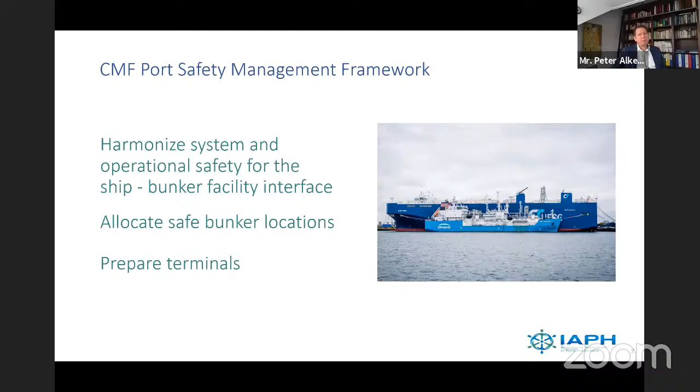We provide this audit tool to audit the safety management system of a bunker facility operator on several system criteria, including training and competence, resources, maintenance, optimal bunker preparation, safe operations, and aftercare. Based on the audit, a designated authority may issue a bunker operator license.

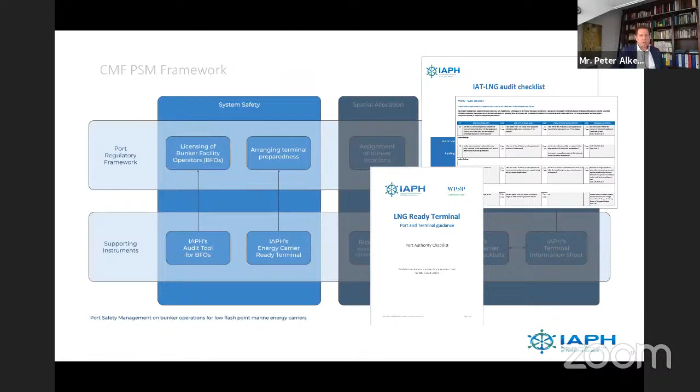On this level, terminals are also prepared on a system level. For this, CMF provides the LNG Ready Terminal guidance tool. It may be used by ports to initiate the preparedness of terminals for safe cargo handling of vessels with new types of fuels and safe ship-to-ship LNG bunkering along their berth.

Also, on an operational level, we ensure harmonization of operational safety of all parties involved in the bunker process. On this level, we provide the bunker checklists, which have already been in use since 2013 for LNG truck-to-ship, ship-to-ship, and station-to-ship. Terminals are also involved on an operational level, and CMF provides the terminal information sheet, which is part of the bunker checklists.

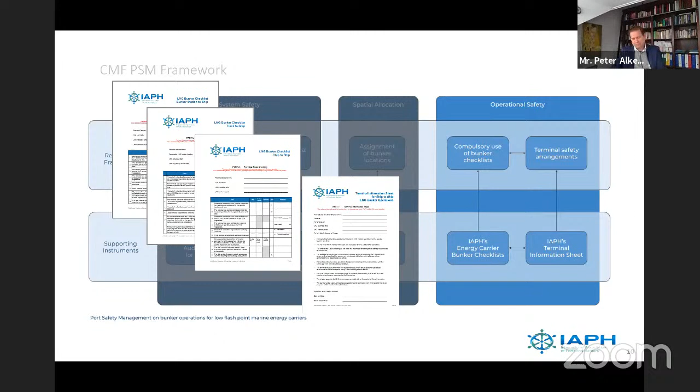And then we come to spatial allocation, and this is quite important. Often, based on national legislation, a port authority may have to decide at which locations bunker operations in a port area are permitted, taking into account, among other things, the spatial planning of the port, risk analysis for external safety, and nautical safety. For CMF, it's rather hard to develop generic support for this safety level.

We are, however, aiming to provide guidance in the port guidance tool we work on. For some ports, it may become the hardest challenge for new fuels: where may the port allow bunker operations, looking at the risks for the surrounding area.

External safety is about risk to the surrounding area when handling hazardous substances, which most of the new fuels actually are. On this slide below, you see the LNG bunkering map for the Port of Amsterdam. It's based on external safety research. Based on quantitative risk analysis, we have assigned bunker locations in the port.

This is not something unique. Port of Rotterdam has done the same, for instance, and I'm convinced that other authorities in countries around the world do likewise for LNG and new fuels.

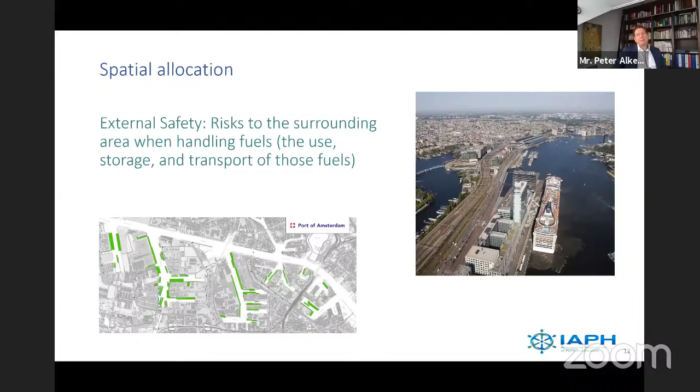As Port of Amsterdam, we also recently initiated a study on the risk of new fuels, including methanol, hydrogen in several states, and ammonia in several states. And although the results are still preliminary, we did already find that for some fuels, it's going to be, again, to say the least, challenging at some locations in the port.

That brings me back to the available instruments we have. This table actually shows the lessons we've learned from LNG. The total package of tools for LNG was completed in September 2020 with the release of the LNG Ready Terminal tool. We consider our LNG tool package as blueprints for the new upcoming fuels. So let's see where we are working on.

On a system level, we're trying to make generic tools of all the tools we have for LNG. The audit tool has to become generic for all fuels, and also the LNG Ready Terminal tool. On an operational level, we've been starting to work on checklists for new fuels, for instance, a truck-to-ship cryogenic checklist for both LNG and hydrogen. Also for methanol, we're developing a flammable and/or toxic liquid checklist for truck-to-ship operations.

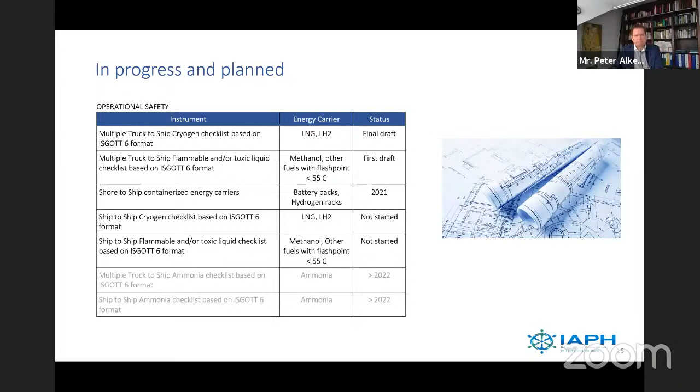I'm sure that the slides will be shared, so I won't go into detail on all the other tools. That brings me to my last slide.

The shift towards new marine fuels brings challenges for ports. High-level, high-quality safety management is required for the new fuels now under consideration, both on the vessel and port side. Ports are working hard to overcome these challenges, and the IAPH Working Group on Clean Marine Fuels continues to develop instruments that support improving existing bunker safety frameworks in ports. When it comes to the IMO strategy to reduce greenhouse gas emissions, cooperation in the industry is essential. I think it's fair to expect that IMO, as well as IAPH, have a role in stimulating cooperation for the implementation of high-quality bunker safety management.

More information on our tools can be found on our website, including videos and guidance documents. Thank you very much for your attention.

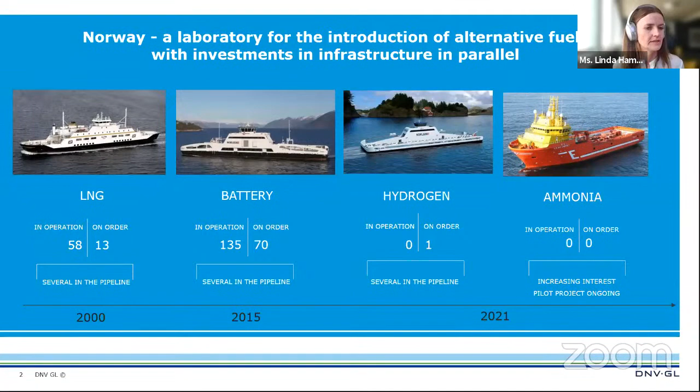In DNV's Maritime Forecast to 2050, we have mapped the key barriers for selected alternative fuels. There is no time to go into the details now, but the report is available online. One key barrier is safety and development of safety regulations. For shipping to succeed in using new fuels, it's a prerequisite that we know how to handle the safety.

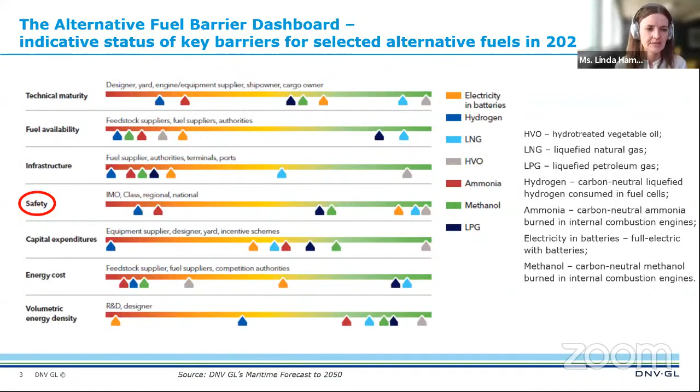So, what are the safety challenges? Most non-conventional fuels are gases or low flash point liquids. They have properties posing different safety challenges from those of conventional fuel oils. The main challenges are fire and explosion. Some are toxic, some are stored at cryogenic temperatures, and there is a high energy content in gas tanks. This requires additional safety barriers to maintain the safety level when compared with conventional fuels.

And since the properties are specific for each fuel, there is a need for development of requirements for each fuel type.

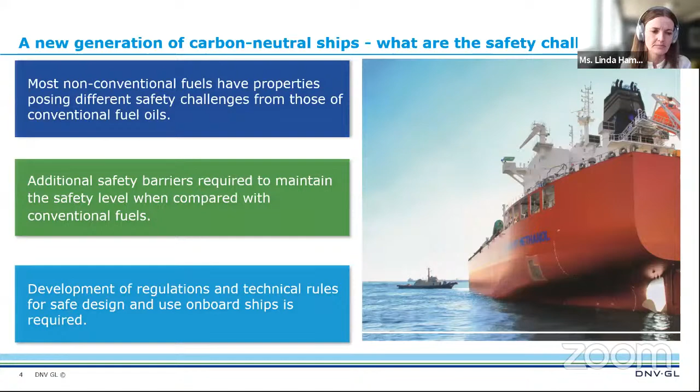It has been a strong focus in Norway to establish requirements for the safe use of alternative fuels, removing barriers to their uptake, starting with national regulations and class rules for LNG 20 years ago, followed by class rules for fuel cells, batteries, methanol, and LPG.

On behalf of the Green Shipping Programme, a public-private partnership in Norway, DNV has recently completed development of an ammonia safety handbook with input from the Norwegian maritime authorities and other partners in an ammonia pilot project. The intention is to provide practical guidance on safety aspects in developing ammonia fuel ships. The first class rules on ammonia as fuel are planned to be published later this year.

There is also ongoing development work for hydrogen, and DNV is working with industry partners on removing barriers. We have initiated the MarHySafe joint development project designed to advance maritime hydrogen-specific competence. This JDP aims to provide preliminary recommendations for safe and effective introduction of hydrogen as a marine fuel in a safety handbook later this year.

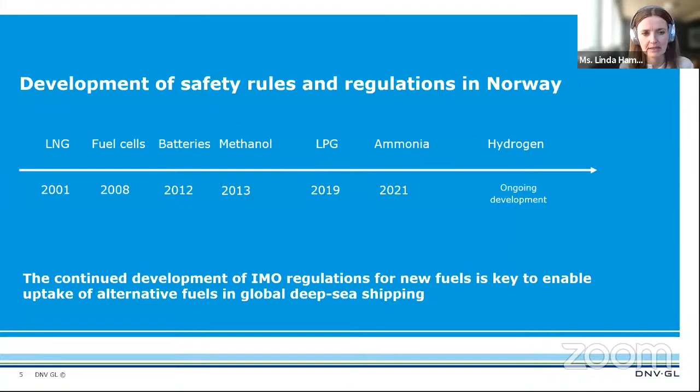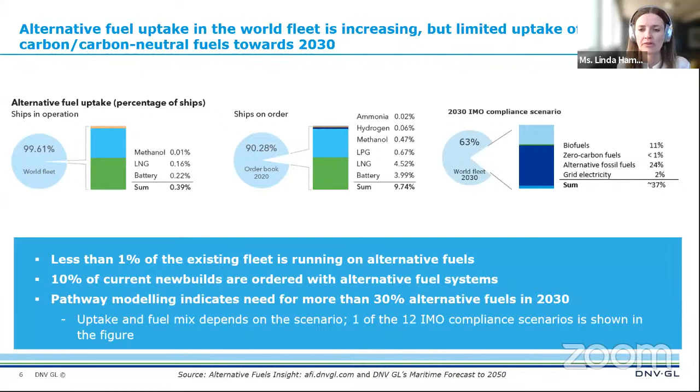To the right, we have shown a 2030 IMO compliance scenario from the pathway modeling in the 2020 edition of the Maritime Forecast, indicating a need for more than 30% alternative fuels in the world fleet in 2030. This is one of 12 IMO compliance scenarios we have modeled, and the uptake and fuel mix depends on the scenario. It should be noted that the picture may be different depending on how the IMO framework develops in coming years.

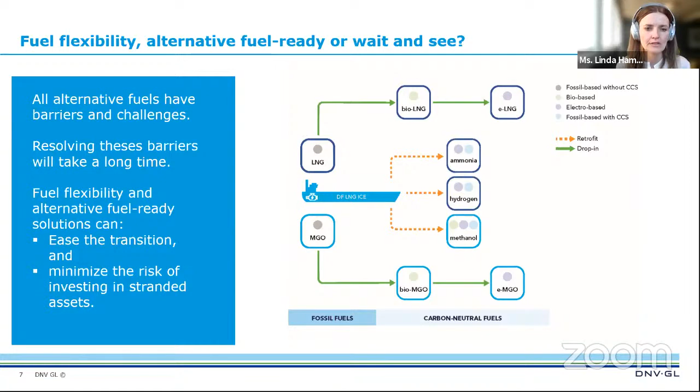If we follow the green line at the top, we see that one can gradually replace fossil LNG with carbon-neutral LNG by switching to bio-based and electro-based LNG when this becomes available. The same flexibility is also possible for MGO as shown with the green line below. For switching to other fuel types, compatibility is more limited and conversion will be necessary for the engine, systems and tanks. By planning a fuel change that requires conversion already at the new building stage, it may ease the conversion at a later stage. This is what we call alternative fuel-ready solutions.

In the development of zero-emission solutions for deep-sea shipping, we need pilots. There are different opportunities in short-sea shipping and deep-sea shipping, and not all technologies are yet applicable in deep-sea shipping. The experience in Norway is that the introduction of alternative fuels and new technologies in short-sea shipping is a good way of maturing technology for use in regional short-sea shipping and later global deep-sea shipping.

The continued development of IMO regulations for new fuels is key to enable uptake of alternative fuels in global deep sea shipping. Thank you for listening.

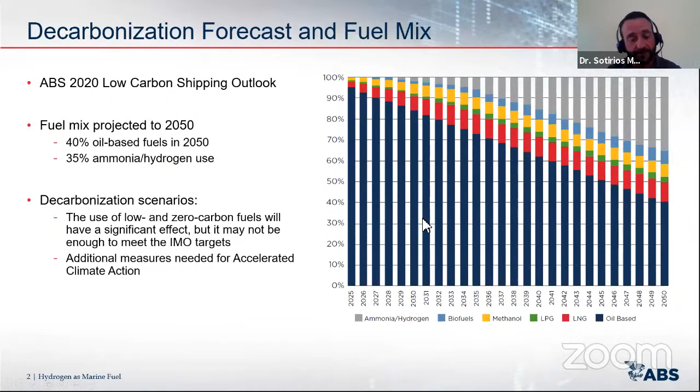That has to do with the fuel containment systems, the fuel gas supply systems, and of course the operational methods and techniques you can apply to maximize the benefit of using a zero carbon fuel such as hydrogen. So hydrogen is at the end of our light gas pathway, and by the end we mean longer term - 2035, 2040, all the way to 2050.

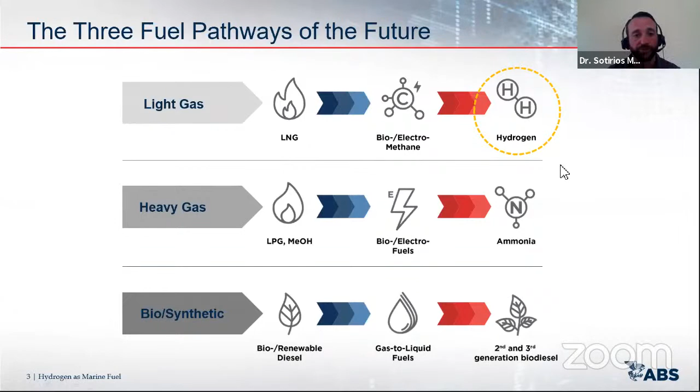Now a few important basic things about hydrogen. Based on International Energy Agency numbers from 2019 global production, about 75% of hydrogen is produced from natural gas, and about 23% is produced from coal. That immediately leads us to believe that the production itself is a carbon intensive process - that does not make hydrogen very green. So we immediately know that in order to promote the green credentials of hydrogen as a fuel, we need to find other ways to produce it, using for example renewable energy and, of course, water as the source.

Hydrogen and ammonia are directly linked in the production pathways, because once we have hydrogen formed from whatever the source is, we can combine it with nitrogen to produce ammonia. So really, the production pathways being linked means they can be produced in the same facilities or in sister facilities, which can be either centrally located or distributed.

The challenge, as you may have heard, with hydrogen comes from its storage and transportation. It's kind of challenging to store it as a gas or a liquid, and I'll tell you about it in the next slide. But recently we've seen the advent of solid or liquid storage techniques, such as using liquid organic hydrogen carriers, for example. I'll tell you more in the following slide about it.

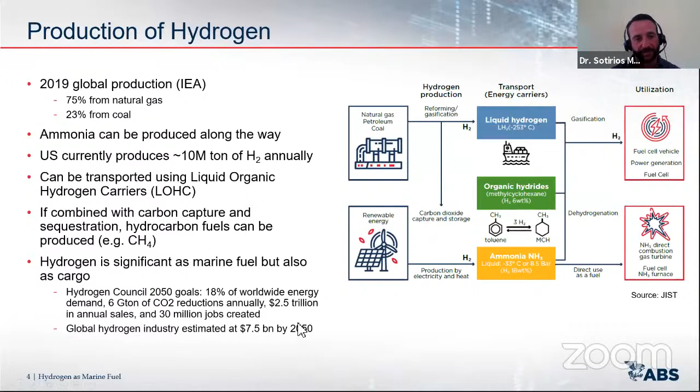Now let's talk specifically about hydrogen storage, which will give you a better understanding of the challenges associated with this zero carbon fuel. As we previously mentioned, hydrogen can be stored as a gas or a liquid, and there are benefits and challenges to either option. It can be stored as a gas at 350 to 700 bar compressed, or as a liquid, cryogenically stored at minus 253 degrees C at atmospheric pressure.

The importance of this comes from the fact that there are applications with stringent requirements in terms of space - automotive, for example. Marine applications not so much, but we still care about space and tank volumes on board. A lot of these solutions are currently in the research and development phase. Recently, in the last couple of weeks, I saw an article about a method of storing hydrogen in a gel type structure that can be easily decomposed to extract the hydrogen on board, whether in a marine vessel or an automotive application.

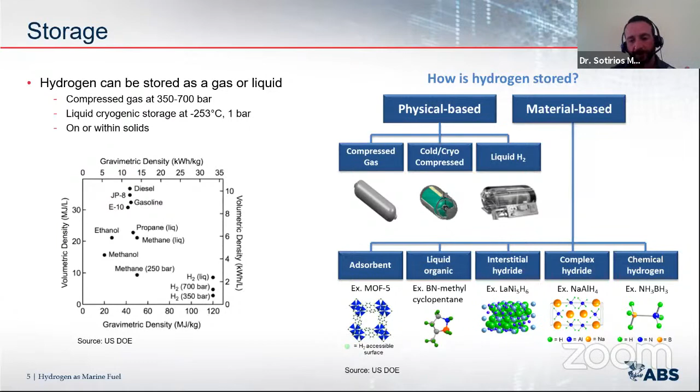Now, with that, I'd like to focus your attention on some of the supply chain framework solutions and challenges we've seen so far. Due to the very limited number of applications of hydrogen in the marine sector, we don't have a lot of examples, but we have one recently published by Kawasaki Heavy Industries, and I'd like to show a graphic that I sourced from that publication.

But as we mentioned at the beginning of this presentation, this is a pretty carbon intensive production process. So there's one thing we need to take care of: make sure we reduce the carbon intensity from production as much as possible. With that said, in terms of IMO actions, there's a lot of discussion about accounting of life cycle emissions when we're talking about alternative fuels.

This is a question we get very often from customers. They would ask, if I use a biofuel or something else produced renewably, can we get some benefit from that? And if so, how are these benefits quantified - what's the credit for us? That's really something you can point back to the IMO to discuss - life cycle emissions accounting.

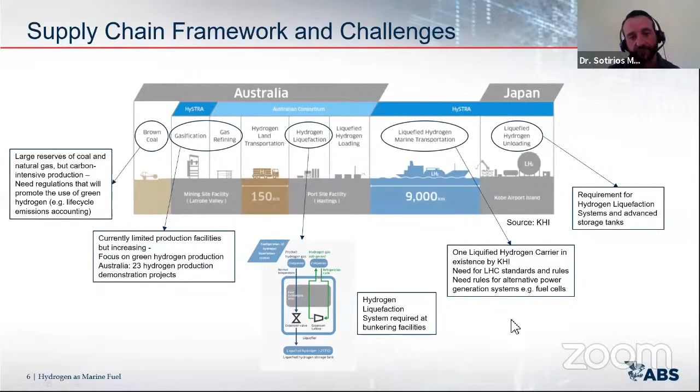Of course, distribution is still an issue. We've seen examples of trucks carrying hydrogen, because the fuel's properties make it very challenging to build pipeline infrastructure. That points toward more distributed or localized hydrogen production stations rather than central production with pipeline delivery to multiple sites.

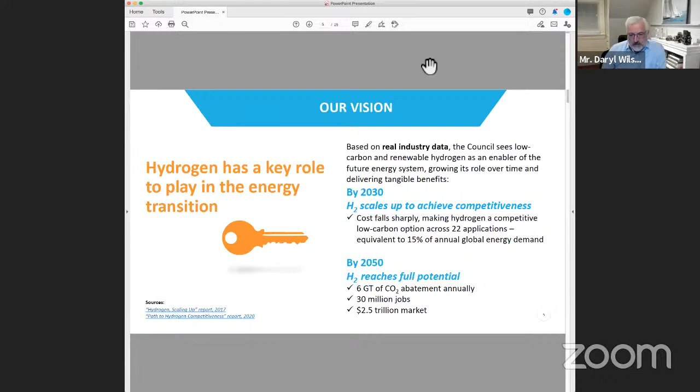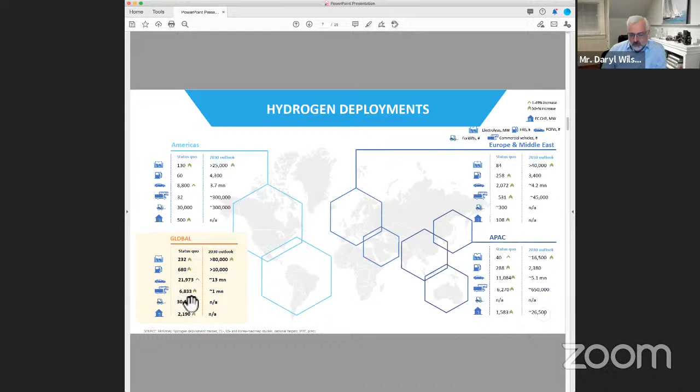Here we summarize some of the applications already under development around various regions in the world. You can see that already we have 680 hydrogen fueling stations globally, more than 20,000 passenger car vehicles, and more than 6,000 trucks. So perhaps more activity than you were aware already.

Early next week, we will release a report which shows a profile of projects that have been announced. You can see there is a lot of activity in Europe, Asia, and Australia, and we're tracking more than 200 projects ongoing for the production and large-scale industrial use of hydrogen in transport and many other infrastructure projects.

The total value of this investment is substantial. It now amounts to more than 350 billion in announcements. And out of that very large number, 38 billion have already passed investment decisions. So a lot of progress of late in hydrogen.

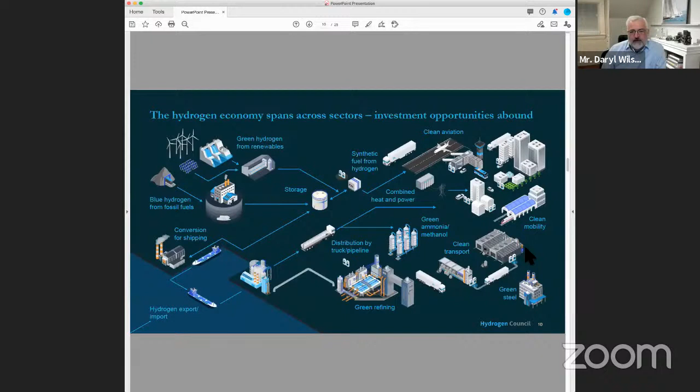One of the compelling aspects about hydrogen is it's able to serve as an energy vector across multiple sectors in society. In fact, we sometimes use the word sector coupling. You can see on this slide that hydrogen is involved in shipping - we'll come to that in a moment - in the migration of renewable energy as an energy carrier and a means of storage, integration into industry, in aviation, in transport. So many functions can be carried out with hydrogen as an energy vector.

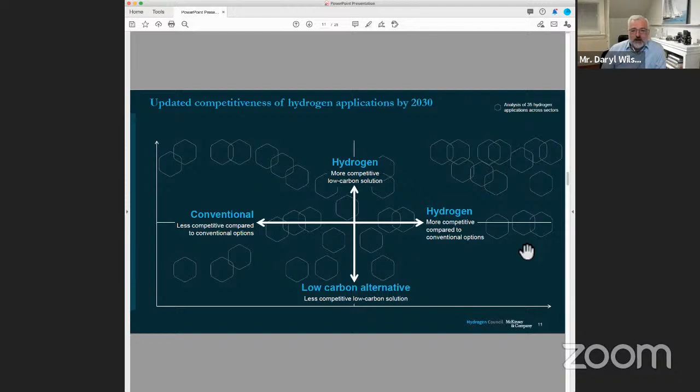To understand these diverse applications, the Hydrogen Council prepared a report, and this again will be updated very shortly, coming next week, with a spectrum of the applications considering which ones are most competitive against incumbent solutions, conventional energy pathways, and then which ones where hydrogen is the most competitive green energy pathway. The attractive location on this matrix is in the top right-hand side.

Listed in the top right-hand side, in the orange, is fertilizer and ammonia fertilizer in particular. So when we discuss ammonia as a fuel for marine shipping, it is actually on the radar for one of the most competitive decarbonization pathways for hydrogen.

You'll also see in the middle of the screen the RoPax marine application and small regional ferry applications, also showing strong competitiveness in terms of hydrogen applications.

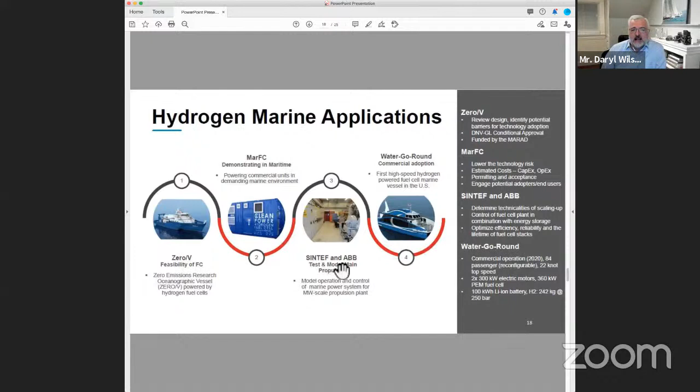One of the key activities of the Hydrogen Council is to make clear the competitive and cost profile for hydrogen. Cost is one of the impediments over time, and we have taken the role to start to show the roadmap for cost reduction to realize some of these applications.

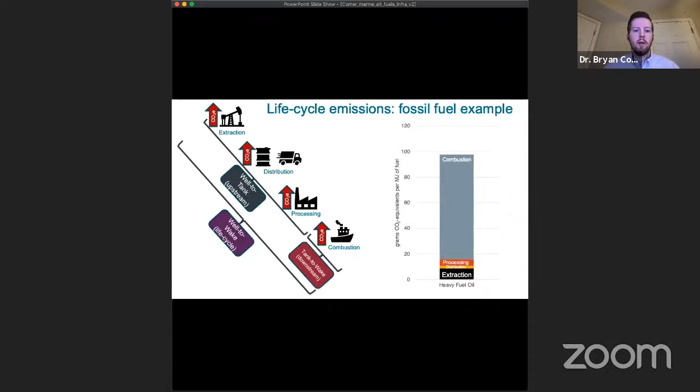Life cycle emissions from fossil fuels, like the example heavy fuel oil on the right, are generally dominated by combustion emissions, which you see in gray. However, upstream emissions, especially those from extraction and processing, can vary considerably.

Now let's consider a biofuel made from a food crop, in this case soybeans. Instead of extracting crude oil from the ground, soybeans are grown and then converted into what's known as renewable diesel. It's called renewable diesel because the feedstock, the soybeans, are a renewable resource. But just because it's called renewable does not necessarily mean that it's sustainable.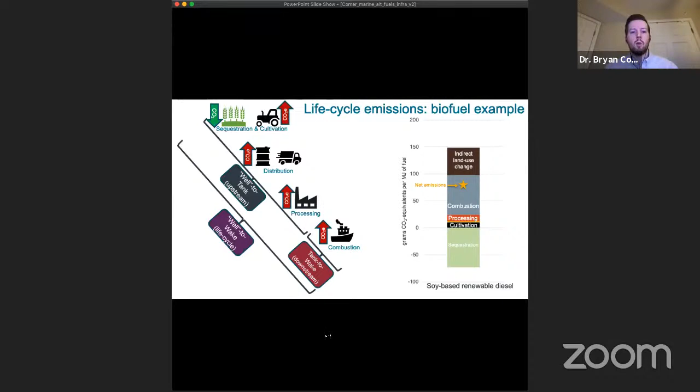Because soybeans are a food crop, the soybeans that are grown to make biodiesel displace those that are used for food. And to continue to meet the demand for soybeans, new land will be cultivated to grow soybeans for food. The emissions associated with indirect land use change can vary significantly depending on the crop and also what the newly cultivated land was previously used for.

So as you can see, one must carefully consider the climate credentials of fuels to determine whether or not they are truly sustainable. To help, the ICCT has developed 3 principles for evaluating the sustainability of alternative marine fuels, and allow me to go over each one in a little more detail.

The first principle is to consider carbon dioxide equivalents, not just carbon dioxide. Why? Because some fuels are zero carbon, but not zero greenhouse gas. This is important to IMO because IMO's initial greenhouse gas strategy aims to reduce greenhouse gases by at least 50% from 2008 levels by 2050 and to phase them out completely as soon as possible this century.

The pitfall IMO must avoid relates to zero carbon marine fuels that nevertheless emit greenhouse gases. For example, burning ammonia emits no carbon dioxide, but it does emit nitrous oxide, N2O, a potent and long-lived greenhouse gas. For now, IMO regulations like the EEDI only regulate carbon dioxide.

Given that IMO's stated goal is to reduce and eliminate greenhouse gases, which are reported as carbon dioxide equivalents and not merely carbon dioxide, the IMO could regulate carbon dioxide equivalents in existing and future regulations, including the EEDI, which regulates the carbon intensity of new ships, and in regulations under development to regulate the carbon intensity of existing ships, including the EEXI and the carbon intensity indicator.

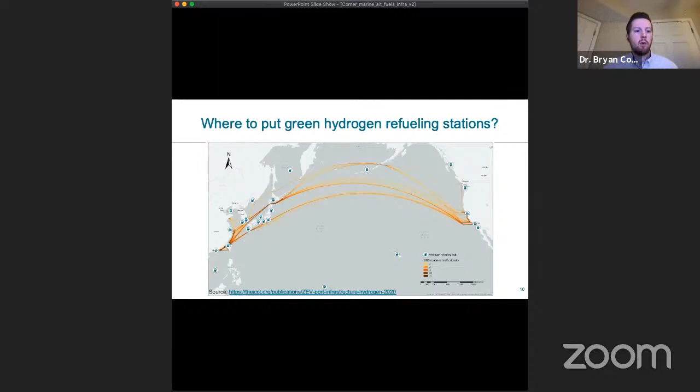The circular fuel icons are places where green hydrogen refueling stations could be placed. To replace all fossil-fueled ships with hydrogen on the Trans-Pacific corridor, ports would need to supply about 750,000 tons of hydrogen each year, especially in Northeast Asia and in California's San Pedro Bay region. This is equivalent to about 1% of the hydrogen used in the industrial sector each year.

But the difference is that this hydrogen would need to be made from renewable electricity to be sustainable, whereas, as we heard earlier, nearly all hydrogen used today is made from fossil fuels.

Now that you've seen an example of how sustainable alternative fuels could be used, let's conclude with some ways that IMO could help ensure that policies promote sustainable alternative marine fuels that have bona fide climate credentials based on the three principles we outlined earlier.

First is replacing carbon dioxide with carbon dioxide equivalents in proposed and existing regulations. Second is calculating carbon dioxide equivalents based on the 20-year global warming potential of climate pollutants like black carbon and methane, for regulations that are meant to align with the Paris Agreement temperature goals. And the third is regulating well-to-wake carbon dioxide equivalent emissions, not tank-to-wake, in policies that are designed to promote the uptake of sustainable alternative fuels.

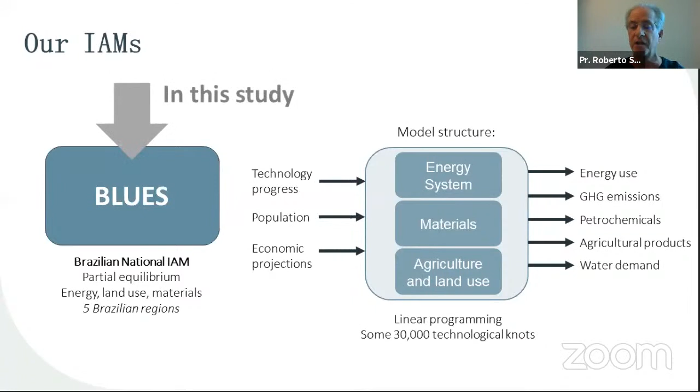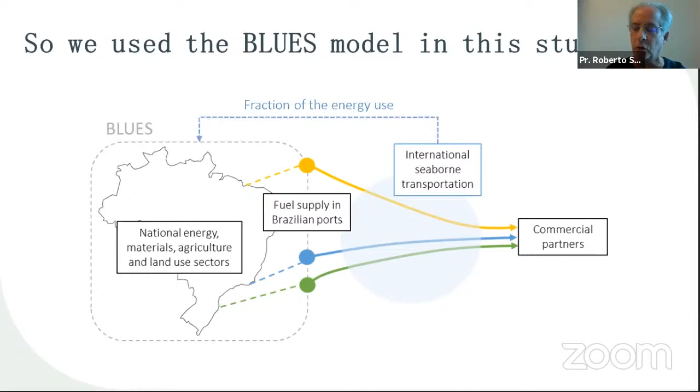So what we have done is basically use or adapt this integrated model for Brazil to represent international shipping and to represent maritime fuels into that model, to see how the model will react to, for example, meeting the IMO target by 2050. So how we have represented these fuels into our models.

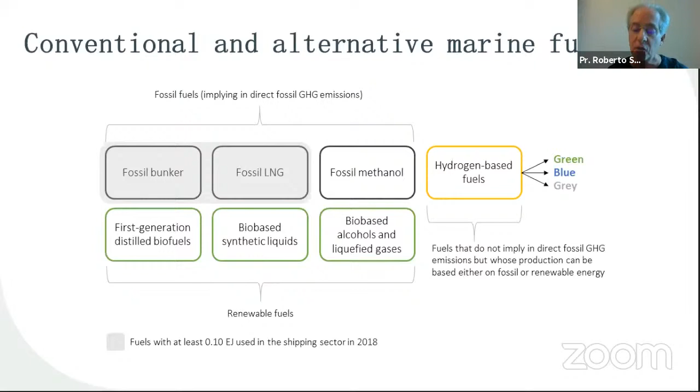We have split these fuels into fossil fuels, implying direct fossil greenhouse gas emissions. So we have looked into fossil bunker, fossil LNG, and fossil methanol. But we also have looked into renewable fuels like first generation distilled biofuels, bio-based synthetic liquids, and bio-based alcohols and liquefied gases. And also from the hydrogen side, we have looked into hydrogen-based fuels, and we have looked into green, blue, and gray hydrogen. This, as I'm going to show you, does make all the difference in the results and analysis I'm going to be performing here.

So this is very briefly how the production routes of these different fuels are represented in our model. In the case of the fossil routes, we're talking about crude oil, producing oil, going through an oil refinery, producing fossil bunker, or you can produce ethene and through oligomerization produce fossil bunker, or natural gas through liquefaction producing liquefied natural gas, or through chemical synthesis producing fossil methanol.

In the case of hydrogen-based, we have looked into hydrogen that could produce ammonia through the Haber-Bosch process, or you can produce hydrogen liquids and then go into hydrogen bunker or electro bunker, depending upon if I use electricity-based hydrogen to do that. It's also important, I'm going to focus on that later, the byproducts associated with some of these routes.

So basically, eventually, we may have a fossil route or a renewable route or a hydrogen route where the fuel for shipping is a byproduct of other products, and this does make all the difference in the results I'm going to be showing you.

In the case of bio-based fuels, we have looked into ethanol for bioethene production and then through oligomerization producing biobunker, or lignocellulose biomass through bioethene or biomass-to-liquids to produce biobunker, or using biomass residues also through BTL or biodigestion to produce biomethanol or biobunker, and also vegetable oil through hydrogenation to produce hydrotreated vegetable oil or direct use as straight vegetable oil.

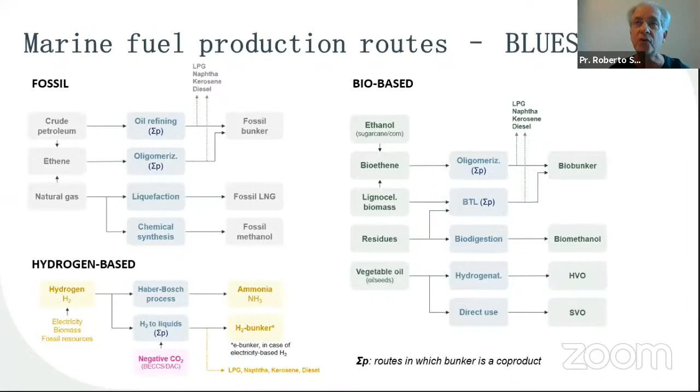So these are all, let's say, fuels that we have put into our integrated model to see the responses to that. So we have run two different groups of scenarios.

In the case of group 1, we have run 4 different scenarios. The first one is a baseline scenario, basically meaning we're not concerned about IMO targets, but simply look into the future of international shipping in terms of fuel. Then we have interpreted the IMO target as being CO2 only, meaning that we would meet the IMO 2050 target in terms of CO2 only, 50% reduction by 2050 as compared to 2008 in CO2 only. And we're not concerned about any national target, but only the IMO target.

Or we have interpreted the IMO target in terms of greenhouse gas emissions, so we are talking about CO2 equivalent in 2050, 50% below 2008 numbers. And also we have added a new scenario, which is the most important one, and hopefully the most interesting one, which is a Brazil below 2C scenario. So basically, we run a scenario for Brazil in a below 2C world to see whether or not IMO targets would fit well into this strategy for Brazil. I think this is the most interesting result I'm going to be showing you later on.

Also, in the case of group 2, we have run 4 different scenarios. One is what we call an IMO drop-in scenario, which basically means we meet the CO2 equivalent target for IMO, but only using drop-in fuels. Or the same way, let's say we meet the IMO target in CO2 equivalent, but only using hydrogen bunker fuels, or only using methanol, or only using ammonia.

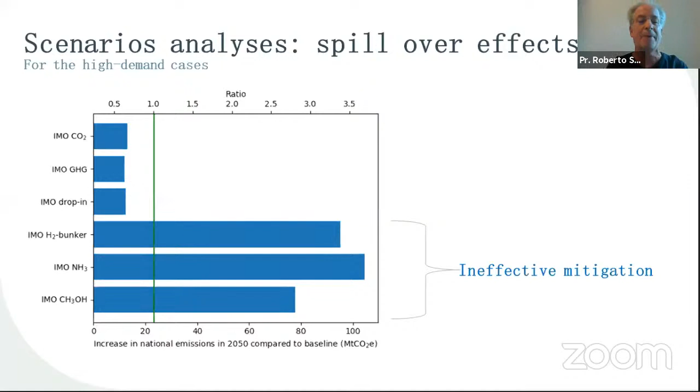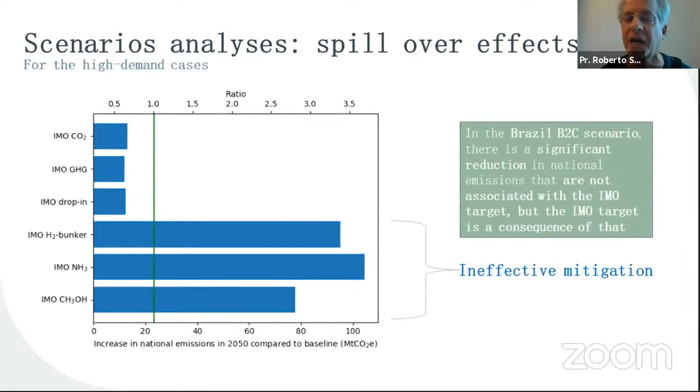It's interesting to say that in the below 2C scenario for Brazil, we do not have any significant impact on national emissions. On the contrary, the below 2C scenario for Brazil, as a side effect, also has the IMO target embodied into that solution.

So thank you very much. So the message here is exactly that: the real interpretation of the IMO target should be in a broader context of integrated assessment model, so that we see the target is a byproduct of a country's result.

Just to get the big picture, most of the projects included in the mapping have a connection to Europe—about two-thirds of the total 106 projects. There's several reasons for that: we're based in Europe, we have a lot of member companies based in Europe, so that biases the research. But we also think there is a lot of activity going on in Europe, and Norway, the Netherlands, Denmark, and Belgium all have numerous projects in the mapping.

Since the first edition, we've managed to expand the geographical spread so that we now include almost twice as many projects in Asia as before. We believe and expect there are many more projects we have not yet uncovered, but based on the timing of the projects we have found, we suspect there is an increase in activity happening in Asia as well. So we do see a broadening in the geographical spread of activity in this area.

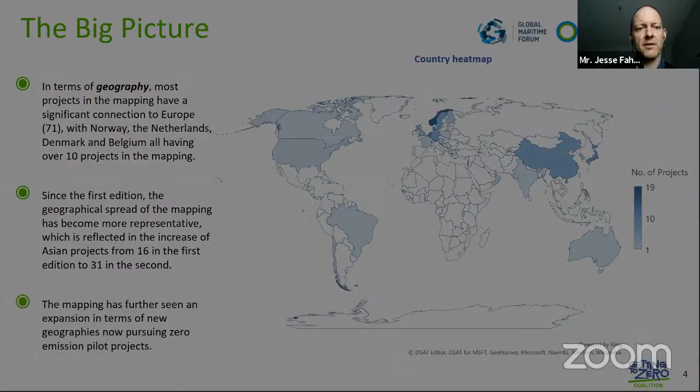We've also seen a couple of new concept studies launched in 2020. For smaller ships, we see a continuing trend towards hydrogen and battery power, and in fact a lot of combinations of the two. This is perhaps unsurprising, but what you might guess from these two bits of information is you're getting increasing specialization in the demonstration projects.

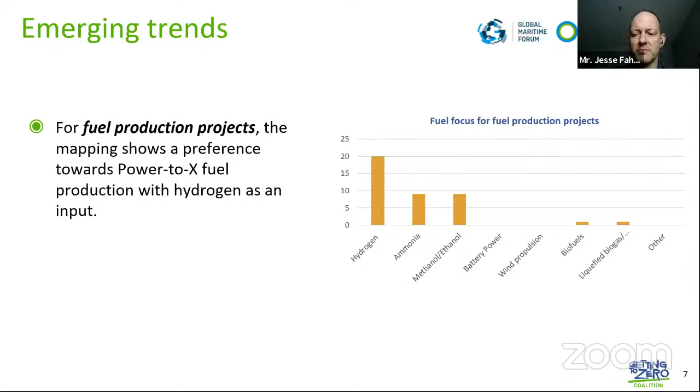On the fuel production side, there's been no major shift in trends here over time, but we do see focus on power-to-X fuel production, so hydrogen-based fuels, as really the dominant focus for these studies. That's perhaps not so surprising, given that some of the other options are more mature and maybe don't require quite as much demonstration or piloting.

In terms of project type and developments, if we look back at the first edition of the study, about 10% of the projects included have since then, in the last 6 months, announced a new phase or expanded the size or scope of their work, which we think is very positive. Of course, we hope that will end up being a much larger number over time. 6 months isn't that long—many of these projects have 4 or 5 year timelines.

Of the 106 projects in this mapping, over half received direct public funding. It's important to clarify that there are many kinds of public support that do not appear as direct public funding through easily identified public funding vehicles, so there's probably other kinds of public support for some of these projects. But the majority of public funding for these projects has originated from Europe.

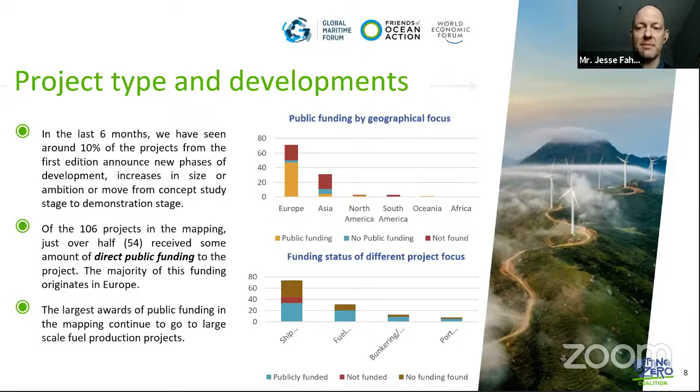The largest awards of funding go to large-scale fuel production projects. That's also not surprising, given that these are probably the most capital-intensive items in our overview. It's also important to note that while many projects don't report whether or not there is public funding—indicated as 'no funding found' in the lower graph—there are some that specifically identify themselves as not being publicly funded, being fully privately funded.

So what next? This edition of the mapping is actually not public yet. We're happy to share this presentation with the participants today. That's not a problem. We will be giving a broader launch at the beginning of March. And included in that, we'll make available the full list of projects that we've uncovered with the brief summaries, including the information that you saw in this overview for each project.

Our hope is that by making it publicly available, we can help people who are undertaking projects or considering doing so draw upon learnings from other projects, but also just improve the broader confidence in undertaking these initiatives, both from the industry side and from the policymaker side. We're going to continue to update the mapping ongoing, and we expect to release one report every half year or so. Thank you very much.

I'm happy to take questions, of course, in the question and answer period. And if you would like to contact me offline, particularly if you'd like to see if your projects were included in the study or would like to provide information about a project, we'd be happy to receive that. As we say, the updates are ongoing. So thank you very much.

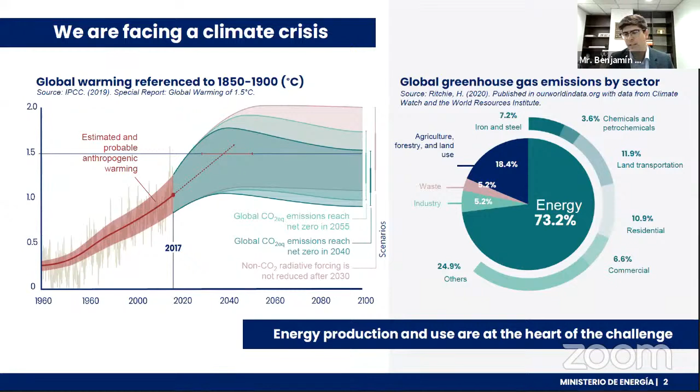So I don't need to explain this to everyone in the audience. This is something that we all know. Energy is at the heart of the climate change challenge. We need to change the way in which we produce and consume energy if we are to curb this rising concentration of CO2 in the atmosphere. And today I'm going to show you what some of the key efforts of Chile are focused on in changing these production patterns in the energy sector.

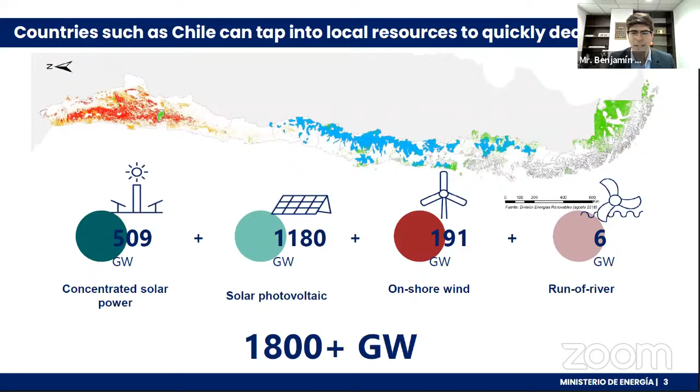So Chile is blessed with a lot of renewable resources. Many of you probably know this, as many other countries in the world. The curious thing about Chile is that it's a very remote country with a very small economy relative to other countries. So this potential actually outmatches whatever consumption potential we might have internally. So this provides a huge opportunity for the production and export of clean fuels that are going to be carrying this renewable energy through the world and are going to enable its use in several applications, not only in Chile, but in a port in Europe, in a bus in China, and who knows what else.

So we did a study last year with McKinsey & Company to underpin the national hydrogen strategy we were preparing. And according to their numbers, we have some great projections for cost relating to green hydrogen production. And when you have cheap green hydrogen, you also have cheap green ammonia, cheap green methanol, and cheap synthetic fuels, or at least relatively cheap as to other parts of the world. So by 2030, we will be getting to price levels or cost levels that are going to make our green hydrogen fully competitive against gray hydrogen in some conditions. And by 2040 or 2050, our green hydrogen could even be competing against natural gas directly, even without any price on carbon. This is fully economic analysis without any price on emissions.

And it's not only a very competitive potential, but it's also a very vast potential. So over 160 million tons of green hydrogen could be produced in Chile with the renewable resources that we already have mapped.

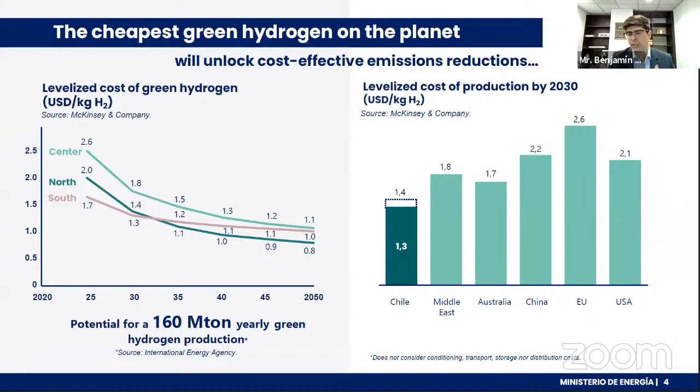So this allows for a wide variety of production of clean fuels, not only hydrogen, but other derivatives as well. And as I mentioned before, we do not have the capacity to consume all that clean energy, so we need to export these clean molecules throughout the world.

This has a clear implication for the maritime sector from our point of view, because this green ammonia will not only be consumed in industrial hubs, but also will be delivered to bunkering facilities all over the world, especially in the north of Europe and in the Southeastern Asia and Eastern Asia regions, for its use in the future zero emission vessels that we've heard so much about in this symposium.

We already have an MOU underway with Singapore that's going to be signed next week to start exploring these international supply routes. We have several others in discussion with private and public entities in the north of Europe. So we're already working on setting up the channels or routes through which we will be sending these clean fuels to consumption centers all over the world, especially with a keen eye on maritime uses.

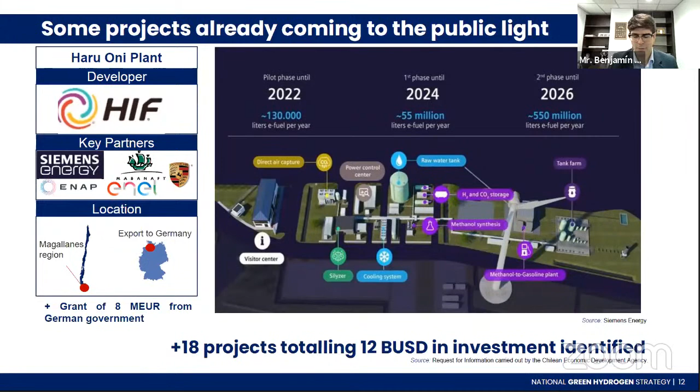So I guess the question for the round of discussion is whether the demand is going to be able to get there, technologically and regulatorily speaking, to be able to consume these green fuels. And with that thought, I'll leave the floor to the next presenter.

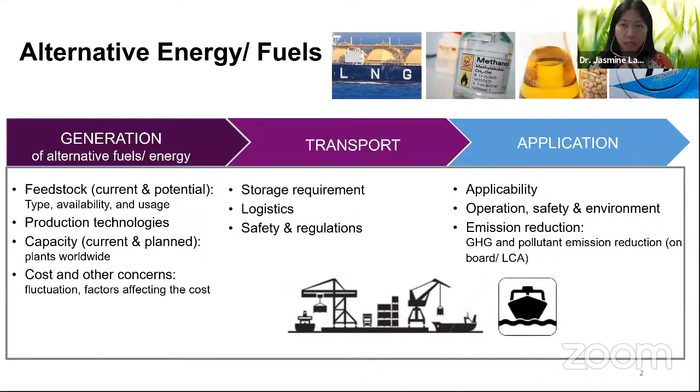And on the right-hand side, that's the application on board - the applicability, but it varies across different types of ships: small ships, big ships, container ships, or other types of cargo ships, let's say tankers, bulk carriers. The applicability would not be exactly the same. Also the operation, safety again, and then also the environment and emission reduction potential, including GHG and pollutant emission reduction on board, and also from the LCA, that means life cycle assessment perspective.

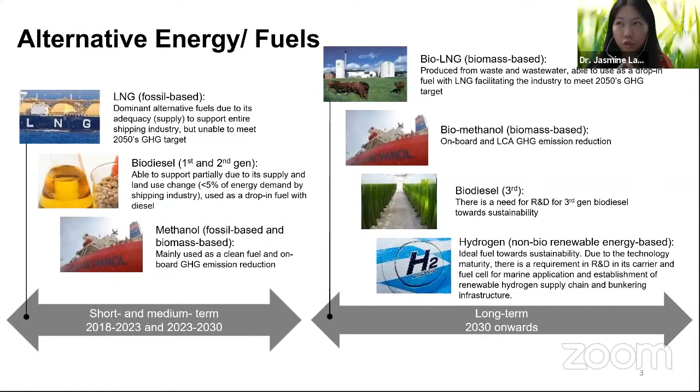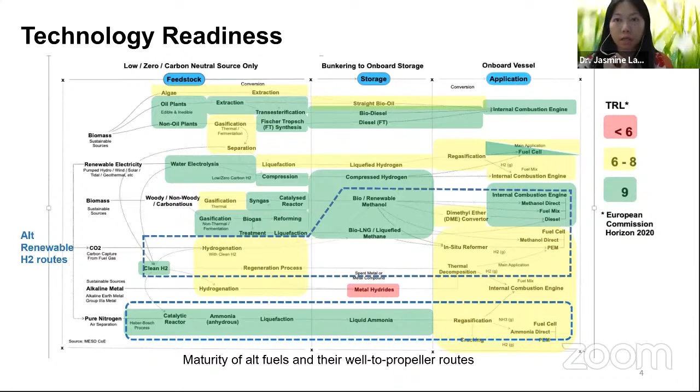And there are other routes as well on alternative renewable H2 routes. So these two are the options we consider, for example, from carbon capture, and also even from pure nitrogen, then producing ammonia, fuel cell, and these are the different options. At the moment also there are some things that should be done in order to make the technology or the alternative fuel ready for the IMO targets.

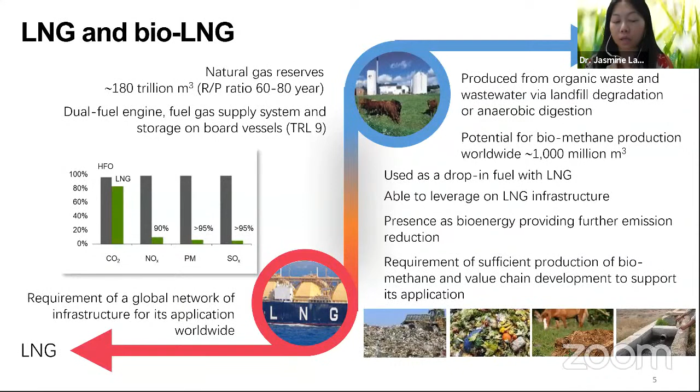And also, I would like to highlight one point, which is also interesting: there is a potential for very massive biomethane production worldwide as well. So these are the key facts based on the research.

So here, almost towards the end of my presentation, if you don't know, Singapore is actually the largest bunkering port in the world. We are a major transshipment hub. We are also the largest bunkering hub in the world. That's why alternative fuel and related matters are very crucial for Singapore. So here I would like to share some efforts to pave the way for low carbon options in Singapore, including LNG. Singapore has started quite long ago already.

We have the Singapore LNG terminal, which was started in 2013 and is the first open access multi-user LNG terminal in Asia. There are many R&D projects ongoing in low carbon fuels, alternative fuels, cleaner fuel options, including living labs for newer technologies, onboard emission measurements, sea trials, etc.

This is a new point I'd like to bring out: digitalization. It sounds like at the forum we're only talking about alternative fuels, so what's the relationship between digitalization, which is also a key hot topic nowadays? The key point is that digitalization helps to improve integrated services and efficiency, and in a way it can reduce emissions. Particularly in relation to bunkering, Singapore is working on streamlining the bunkering process and researching digital bunkering, including documentation, making the whole process more streamlined, digital, and efficient. So for bunkering of alternative fuels, it may not be only about the technology or hardware side, but also the software side - the process, documentation, and standards.

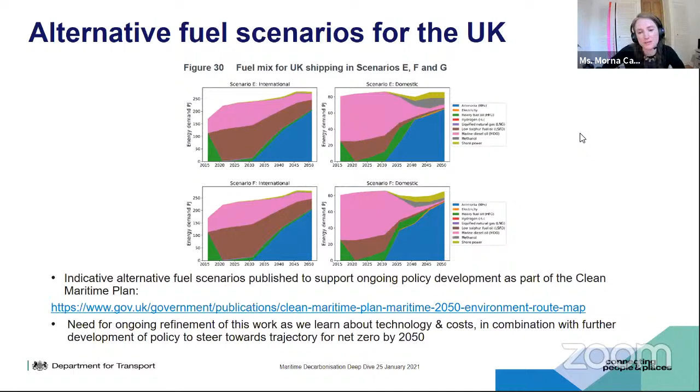In terms of how we are progressing in order to try and support the commercialisation of these fuels, we just last year announced the launch of a £20 million clean maritime demonstration competition, which we will be seeking to open for applications shortly over the coming months.

This is a grant funding competition designed to encourage the commercialisation of mid-TRL clean maritime technologies, and try to encourage applications from across all of the UK. It's part of a wider government programme for a green industrial revolution, which of course will be very important for a green economic recovery from COVID-19.

The intention through this competition is to support feasibility studies and real-world demonstrations. And importantly for this symposium, it will be open to projects from a range of different fuel types.

The final word I wanted to say before I pass to my colleagues at the MCA was that we are also running a number of initiatives targeted at COP26, which do have a bearing on future fuels for the sector. Firstly, our Operation Zero initiative, which seeks to bring together North Sea offshore wind developers and secure commitment to decarbonise their operations and maintenance activities.